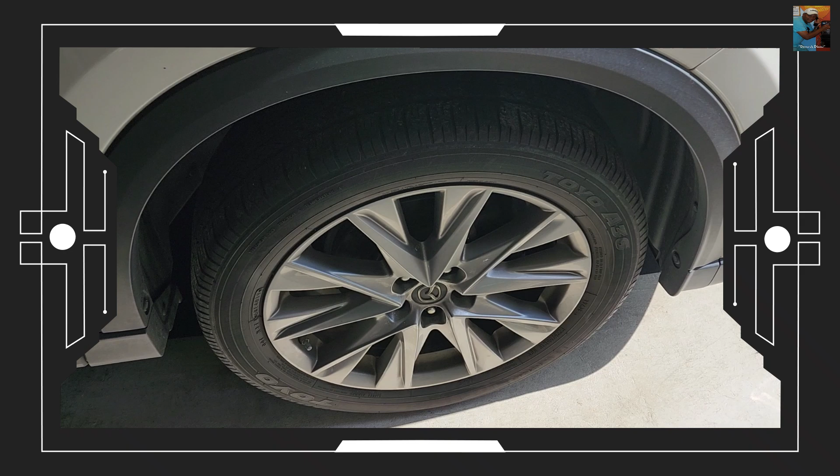So that's the passenger side front tire that we're going to have to remove in order to get access to those belts. All right, these are the tools that we'll be using.

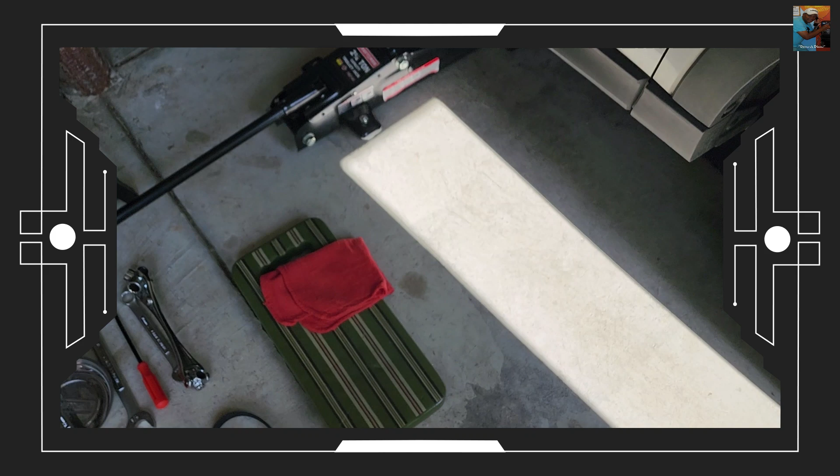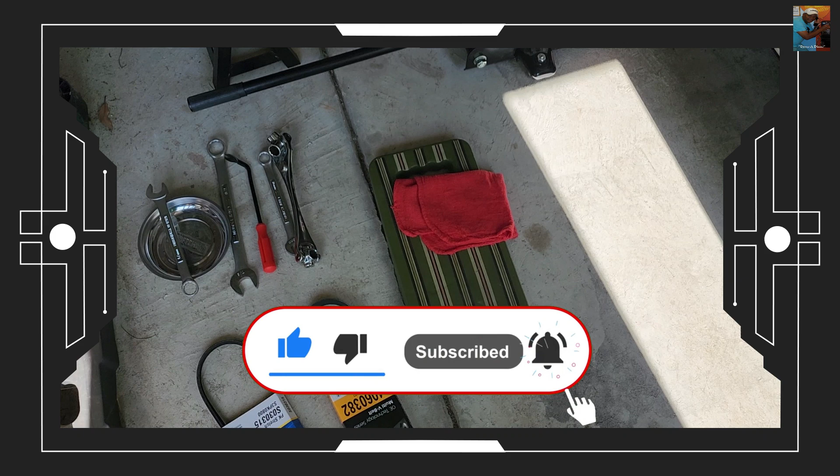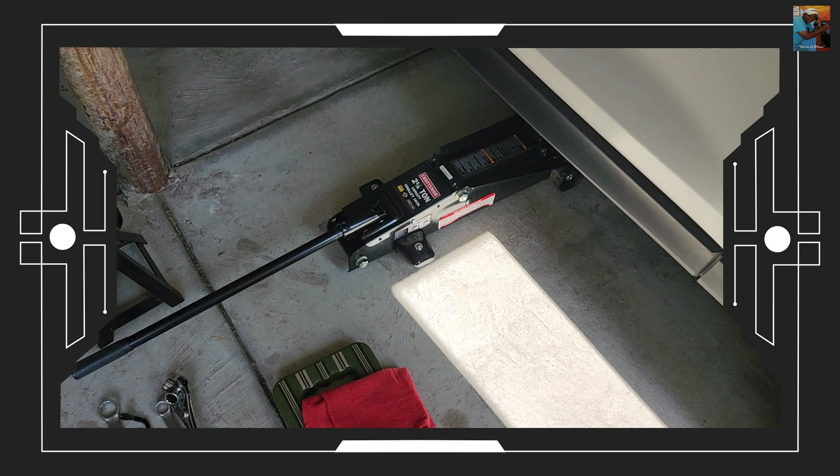We're going to use a 17 millimeter, and also we have the parts for the serpentine and the water pump. We got a rag or towel that we'll have to use in order to remove the water pump belt. And of course we got the jack to jack it up, and the jack stand to go under the car to give us that protection we'll need when the car is up in the air.

Okay, the first thing that we did is we put the car into park, and we also put two blocks behind the opposite rear tire, so that will be on the right hand side, the right passenger side back tire, one on either side of the tire, to just give us some support there. The next thing I did is I went and already loosened the bolts.

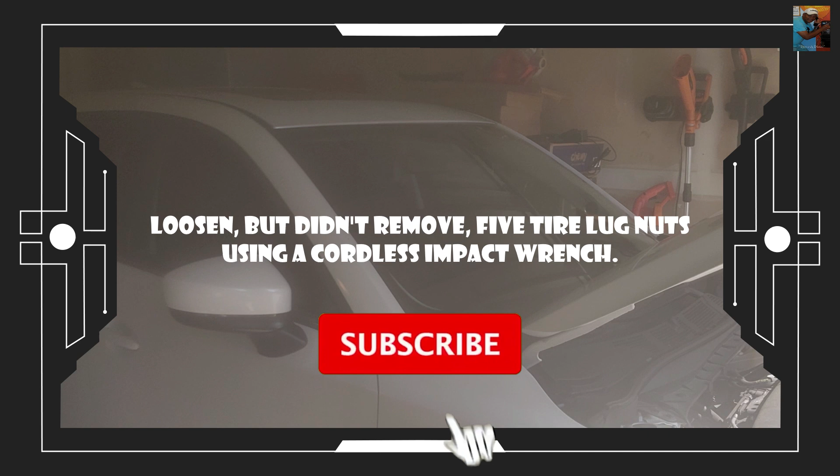I did that with my power tool here. I just loosened, but I didn't remove them. Just all five of them. Okay, there we go. Alright.

Now we want to position this jack. As you can see, there are two markings here, right here where my fingers are. There's a line, and there's a line there. That's where the jack is going to go.

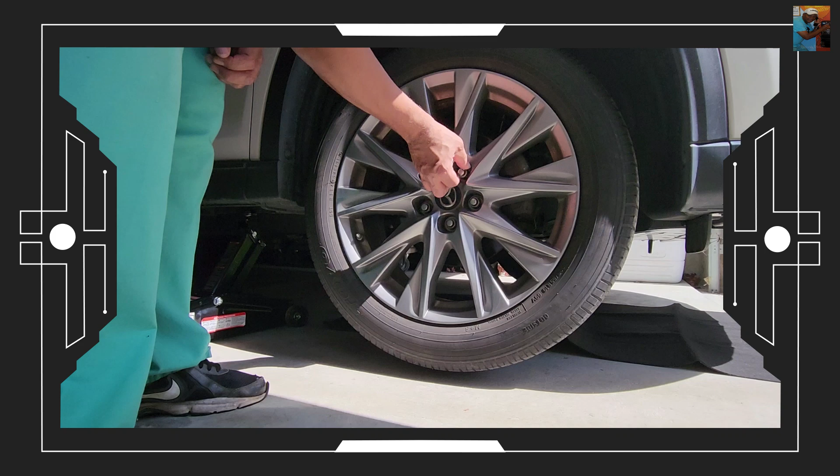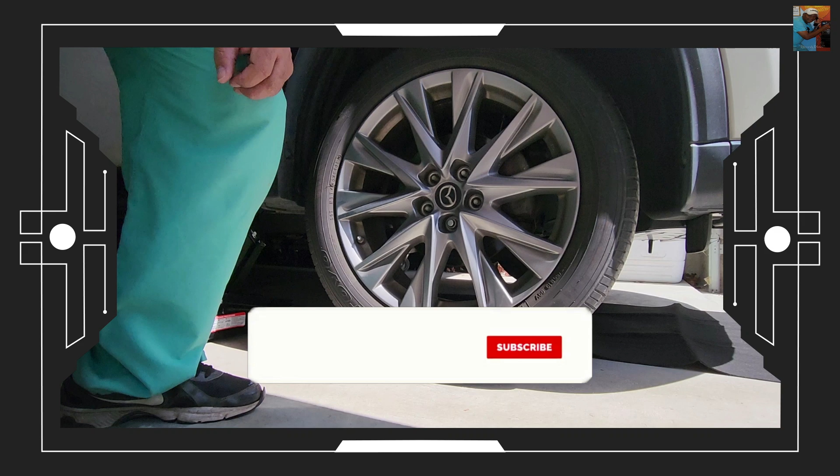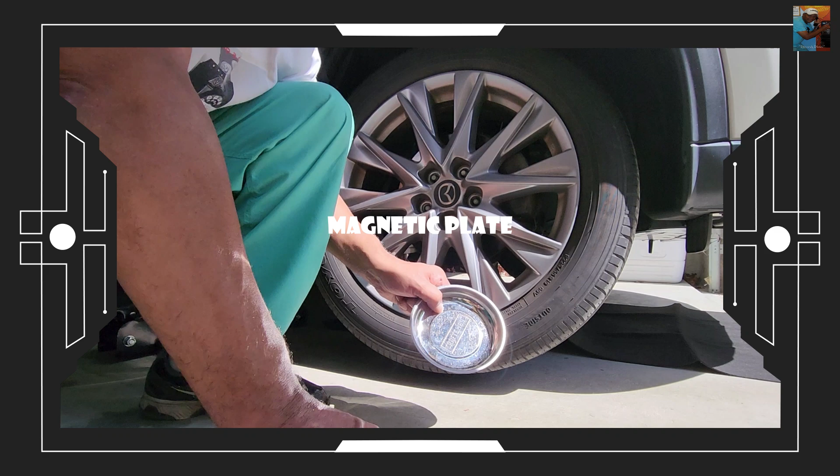Okay, I have a magnetic plate here so I don't lose anything. And when you go to try and pull this off, and it was too low still, then jack it up a little higher.

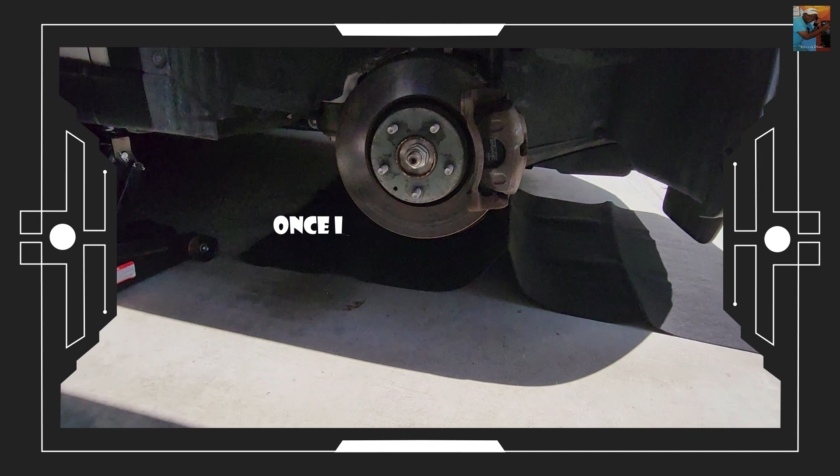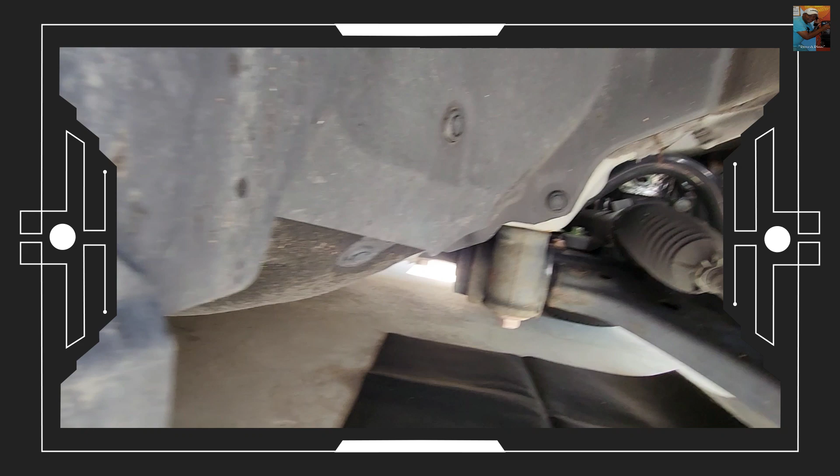So as you can see, once I removed the tire, I put the tire right up under the car to give me added protection, so that if the jack doesn't hold, the tire will act as your protection. And also the jack that I'm going to put right here. Okay? Alright.

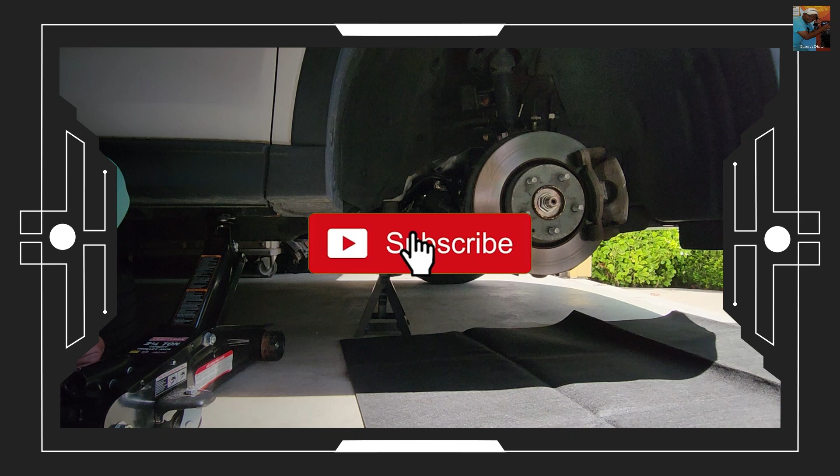I'm not sure if I was able to show you underneath the car what we did. We put that there as added protection.

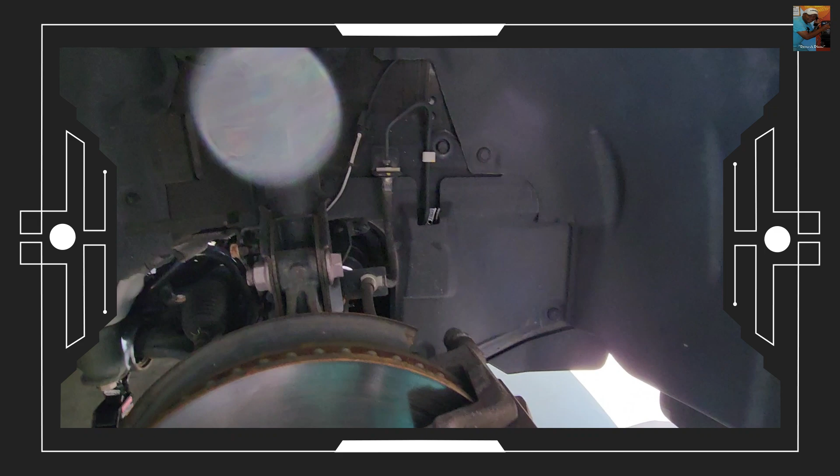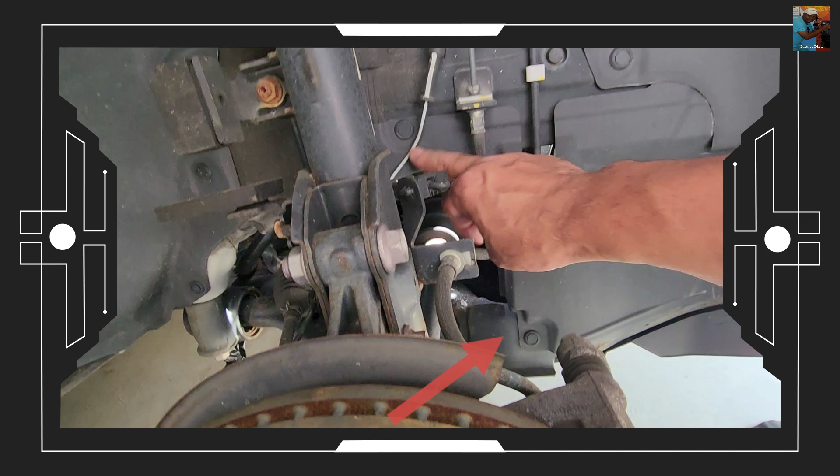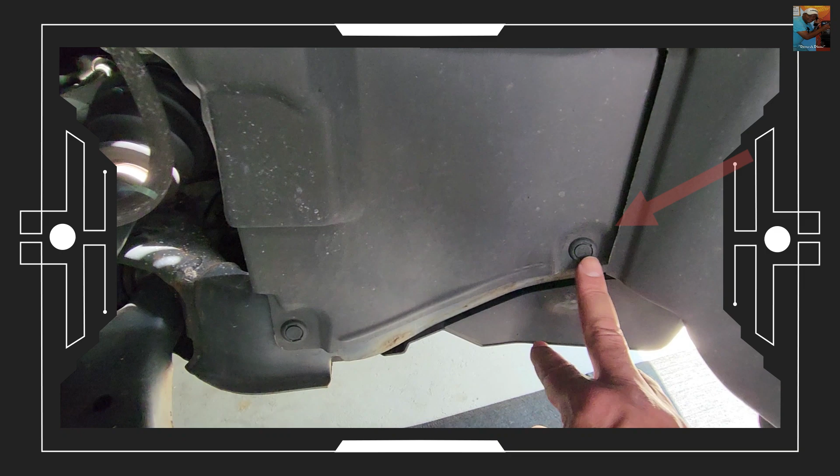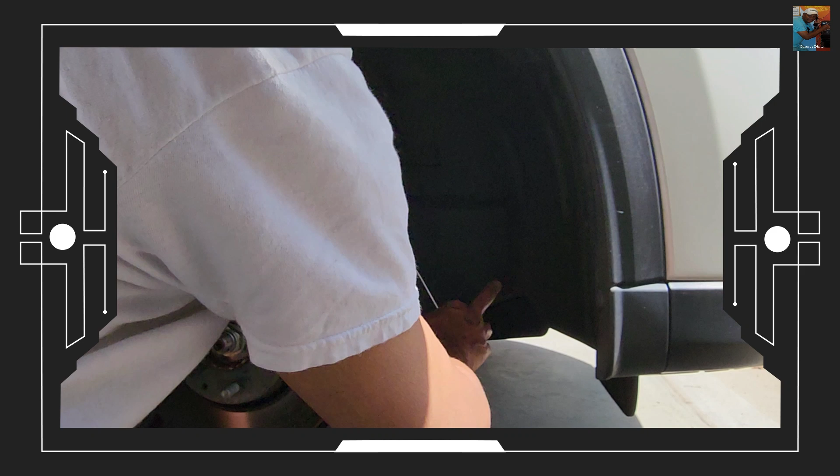Okay, so the next thing that we're going to do is we're going to remove the cover to get access to the belts. So we got 1, 2, 3, and 4, and I believe there's one behind it. There's a clip there, there's one there, and there's one there. Okay, that's 4. 1, 2, and I know there's one behind it. There it is. So we'll make sure we get the one behind it as well. There we go. So a total of 5.

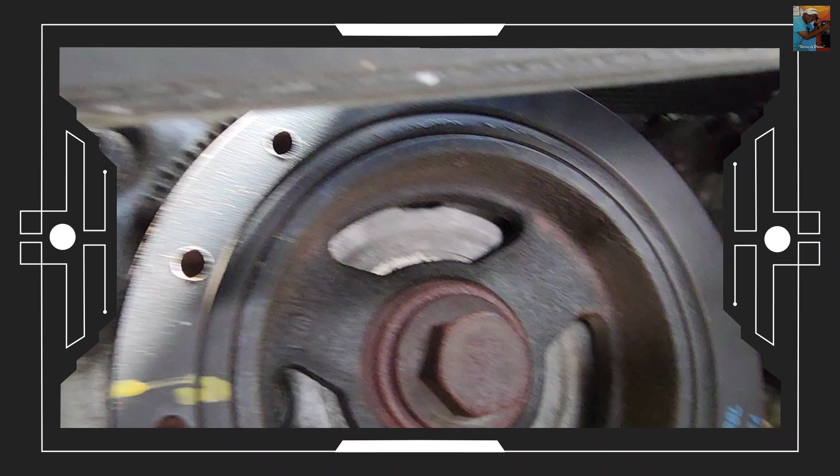We had to remove the cover to give us access to the belt. Let me show you. It's up in here that we have to get to the tensioner in order to remove that tensioner.

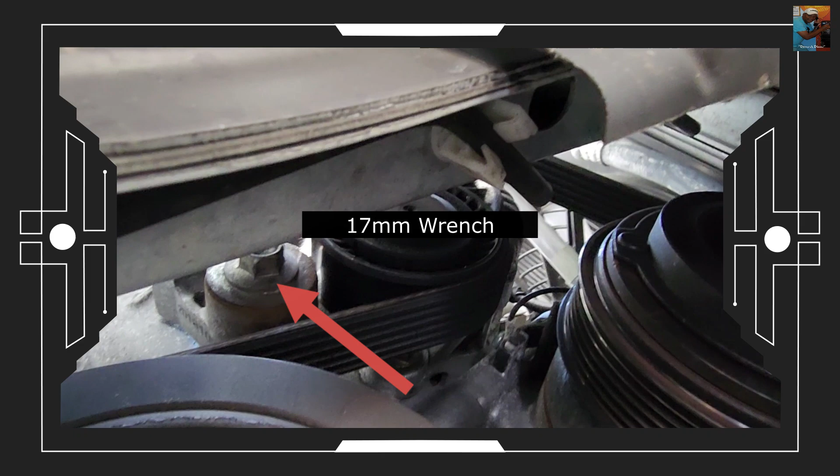There is the belt here. I just went there and I put my 17-millimeter and I was able to grab that. Now I want to just pull it up.

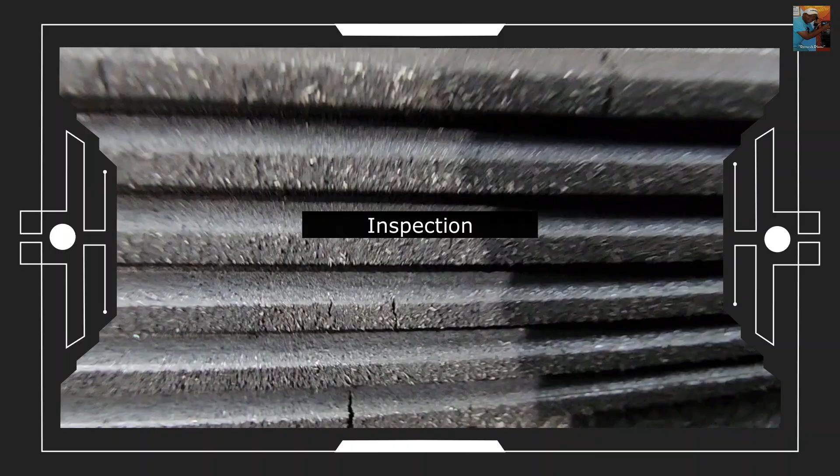Okay, let's inspect it. I mean, there's some, but not a lot.

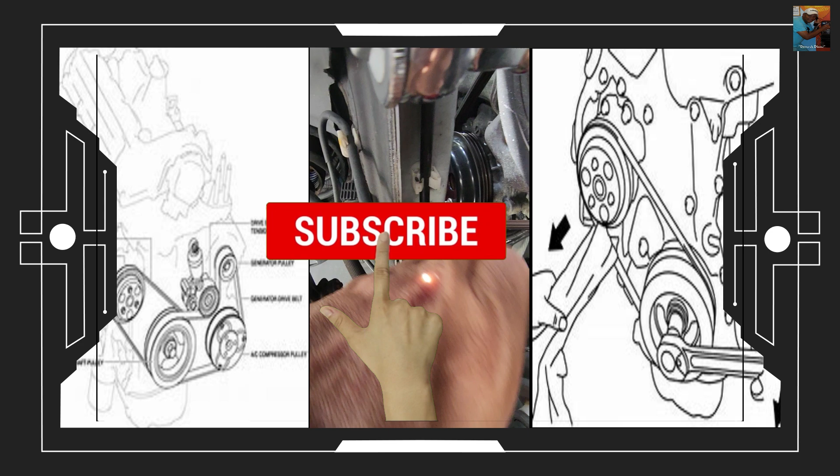The next belt we want to remove is this one here, where my finger is. So what you can see is I put the red cloth in there, then used my ratchet to turn the pulley, and the rag went around. As the rag was going around, I pulled on the rag. The pulley here is attached to the back one, and that made it so that when I did it two times, as you can see the rag going through its second time, it allowed me to go ahead and pull the rest of that off.

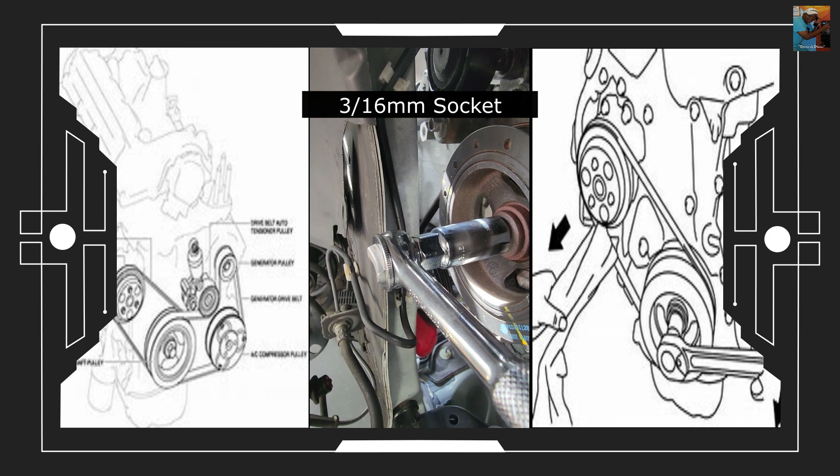So that's the way I had to do that. Let's pull that pulley and put that ratchet in. That's a 3/16 millimeter right here to go in this pulley to turn it. Of course, it's a little hard trying to show it to you, but that's what you have to do to remove the smaller belt.

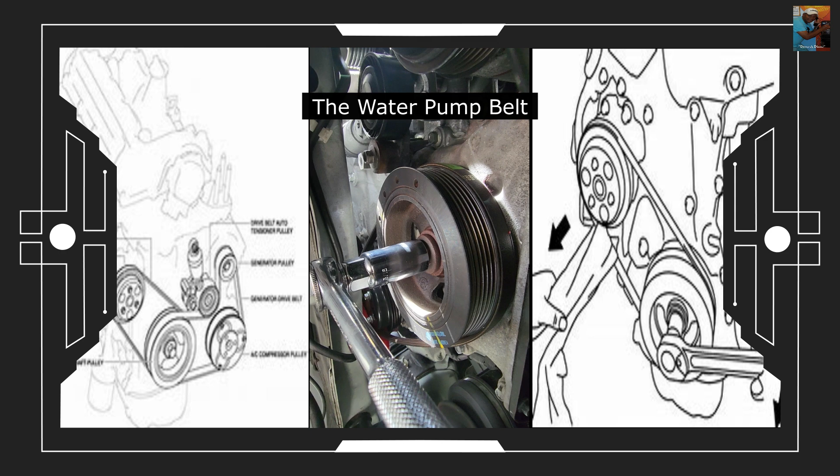Alright, I checked the belt, I inspected the belt. I don't see any cracks in this belt. There's no grease, so nothing's leaking, which is good. You want to make sure you look for that, but there's nothing wrong with these belts.

That's okay, at least we'll go ahead and get it done, and that way we'll put the new ones on. We'll just go backwards, the way that we removed it, to replace it. So obviously the last thing we took off was the small one, for the water pump.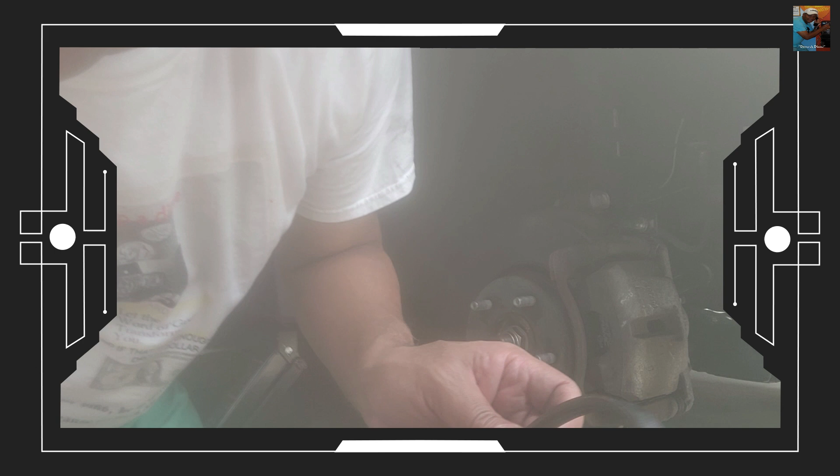Alrighty, there we go. So that's what we'll do. We'll go ahead and try and put these guys back up, see what we got.

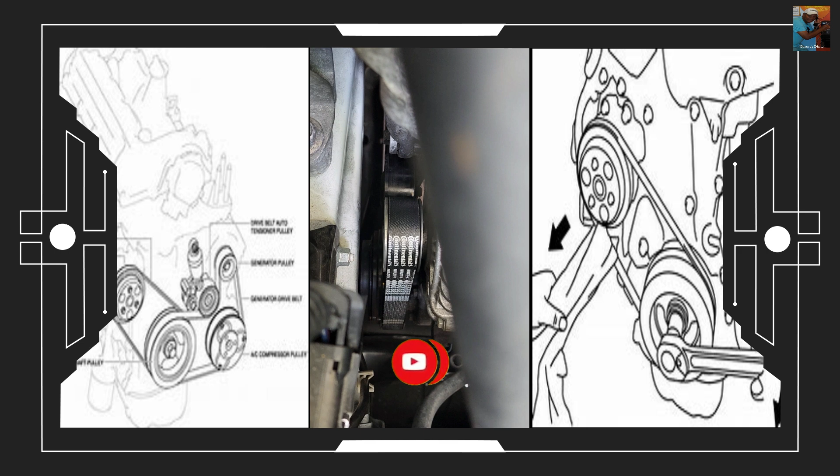Okay, as you can see, I did put the serpentine or V-belt back on. I used the Continental brand, and it did fit. The smaller belt that I used did not fit, so I put the old belt on because it wasn't that bad. I'll probably just order the Mazda belt itself.

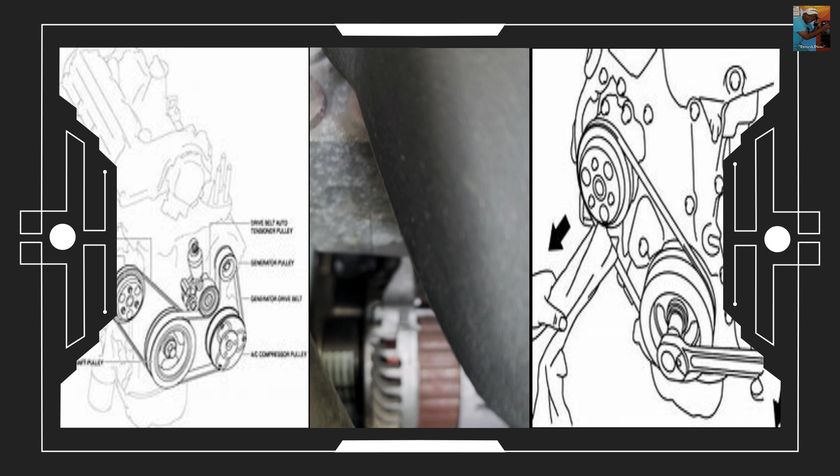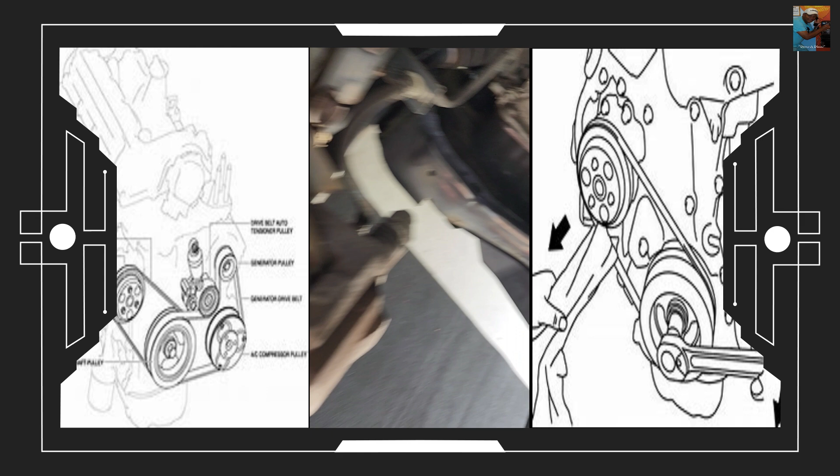So that's what I did. The way that I took everything off, I just went in reverse to put everything back together again. As you can see, those are the belts that we put there, right there. I'll show you down here. So that's what we did.

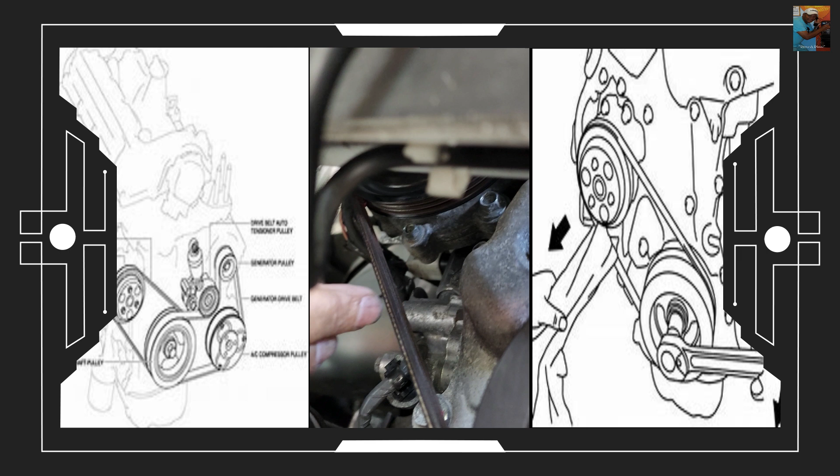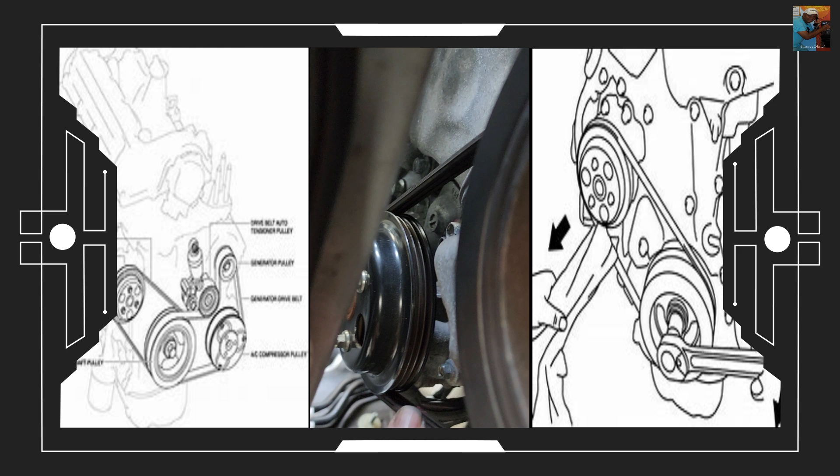As you can see, we put the smaller belt here back on, and I had to use the tool to get that back on. This is the same belt that was there. Unfortunately, I had to use that same belt. Just want to make sure it went back in place. It is in the very rear backside, which is back here.

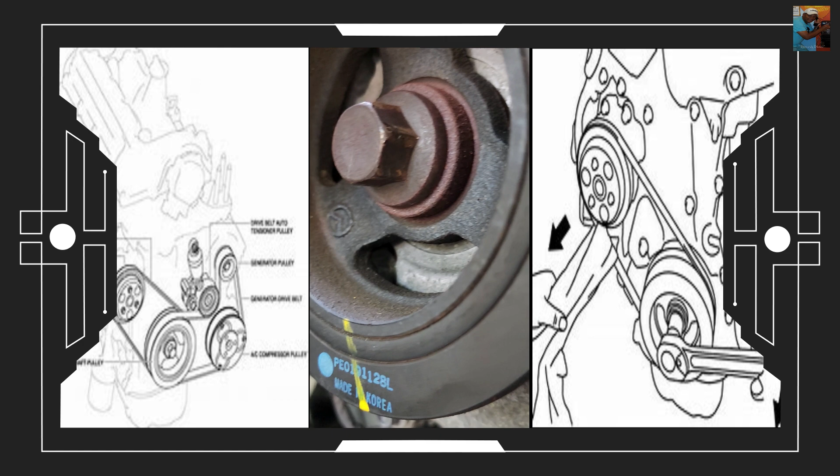The new belt is right there. Just want to make sure that it fits into the grooves here. You could clean it off before you do it, and of course that goes back up here. I don't know if you can see that, but back up in there is where the belt went in. And this area here, up in here, is where the tensioner is.

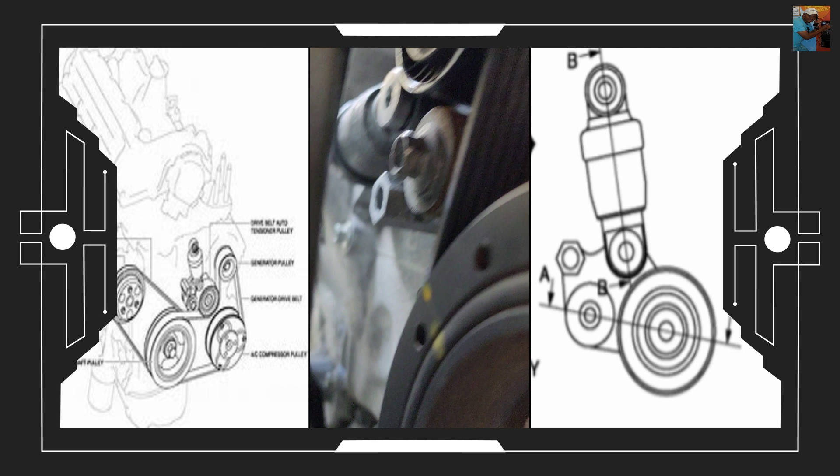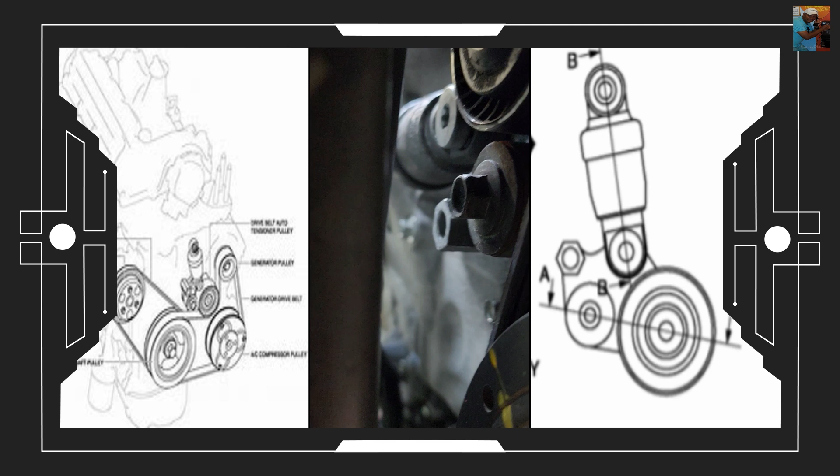The way I got to remove or release that tension is by this hex nut right here. I put a wrench on that, and then another wrench on that in order to give me enough leverage so that it pulled that tensioner down, allowing me to put this new belt on. And you just want to make sure that the belt is on correctly.

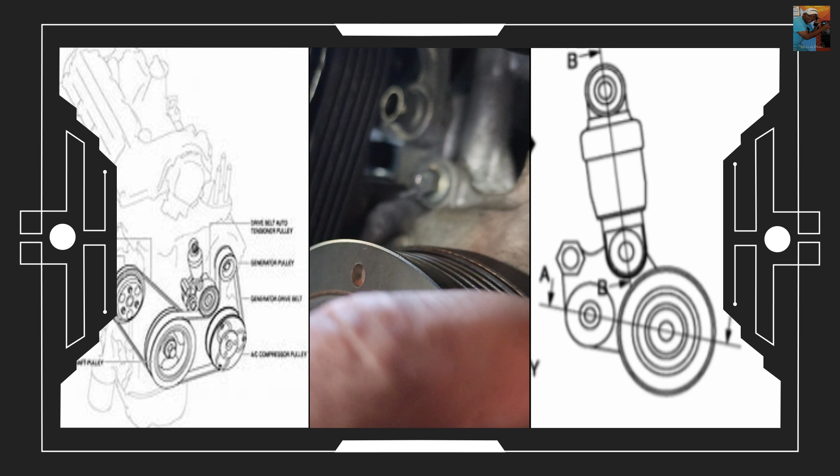You can see where the grooves are, that's going to go where the pulley is, and you have the ridges there. So that's what I did. That's a new belt, Continental belt. I don't think either one of them needed to be replaced. In my opinion, they could have gone for another 6 months with no problem. But that's what I did.

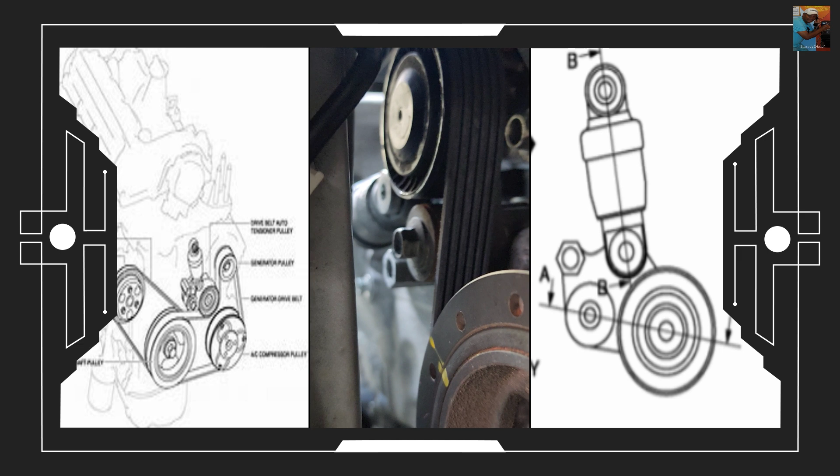I hope you enjoyed the video. Again, this was the replacement of the drive belt, the V-belt or serpentine belt. And of course, we put also the smaller belt on.

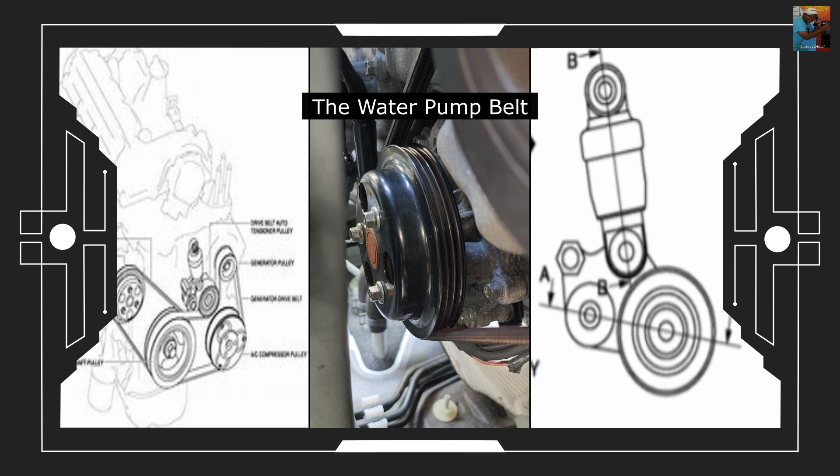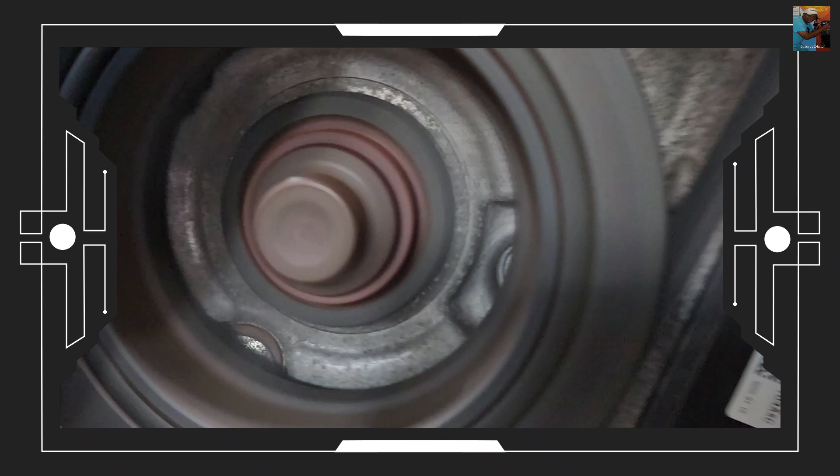Okay, as you can see, the belts are turning. Just wanted to make sure that they were correct. As you can see, both belts are in place and are turning.

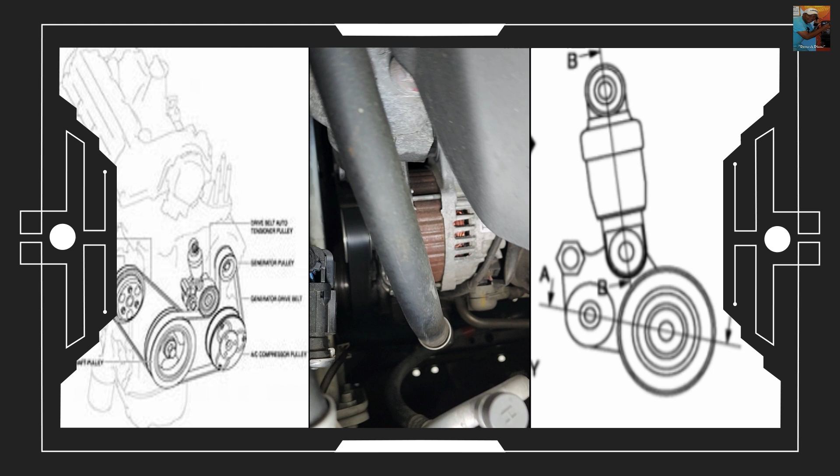That's the one there that we put on, the old belt, and of course the new belt is here. Alright, that's up top. Just want to check that the belts are intact. That looks pretty good.

Okay, and we'll put everything back together now.